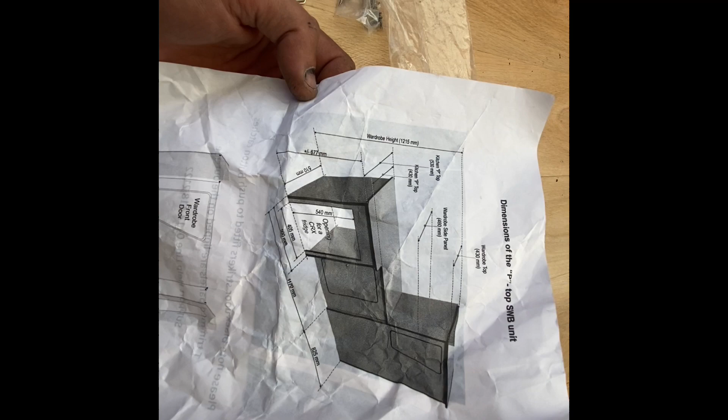That's the instructions we've got, so I've got an idea how it goes together. I shouldn't really need more than that.

Support helpline - support, can you send me out another bloody hinge, please?

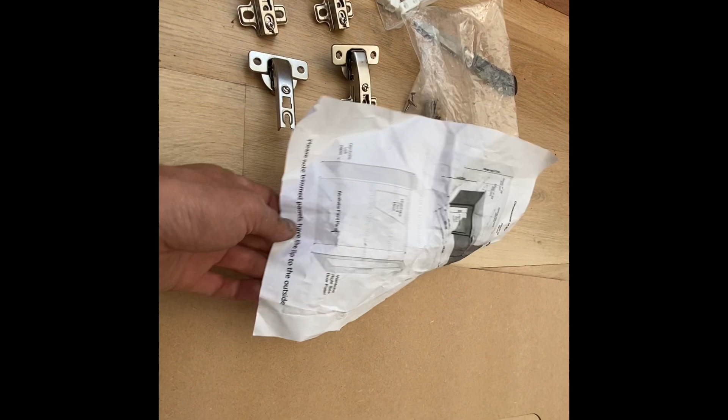And then the door - the other thing I'm going to need is the locks, and I also need the edging strip to go around there. So I'm going to take this measurement here now across there, order some locks for that, and also the trim. I need to do that first so I can get that on its way to me.

So we've got 15mm for the thickness of the door and 20mm for the diameter of the hole for the lock. I've just measured around all of the sides with the tape measure, the ones that have got that groove cut into them for the trim to go on. It's 20 meters, so I've just ordered 20 meters of trim and some push button locks that are 20mm in diameter for 15mm thick board.

I had to just make a guess which way around to have my oven and sink. So I'll have a look now at putting some of the bits together and seeing how it fits. Guesswork.

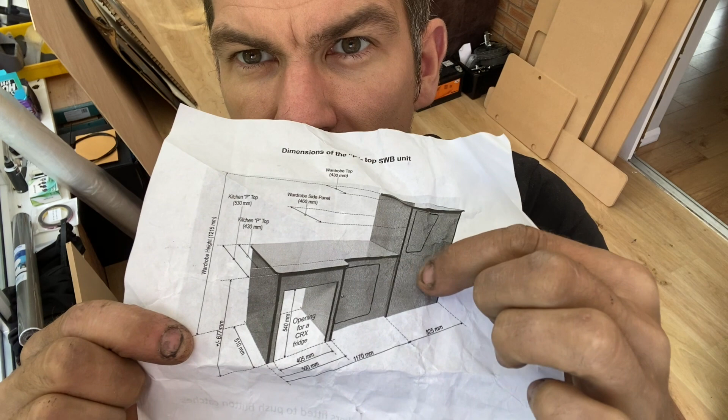So I've just realised something. It came flat packed in 2 boxes - all that stuff over there, which is for this tall wardrobe unit here, and the stuff on the other side here, which is for this unit here. Now it comes with a top, 2 fronts, a door, and 3 sides, so there is actually a side in there.

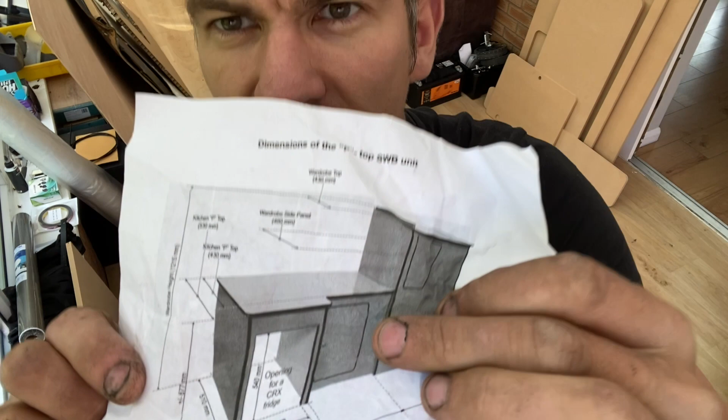And now looking at the picture, I can actually see that there's a trim going down that one, which is that tall one over there, but there isn't a trim there, which means that front section overlaps the front of that. It's good that it does that, because I was looking at lining up this panel to this edge, and I realized that the trim piece that goes around the edge of the wood overlaps the sides, and if that went flush to that, it wouldn't be able to fit on.

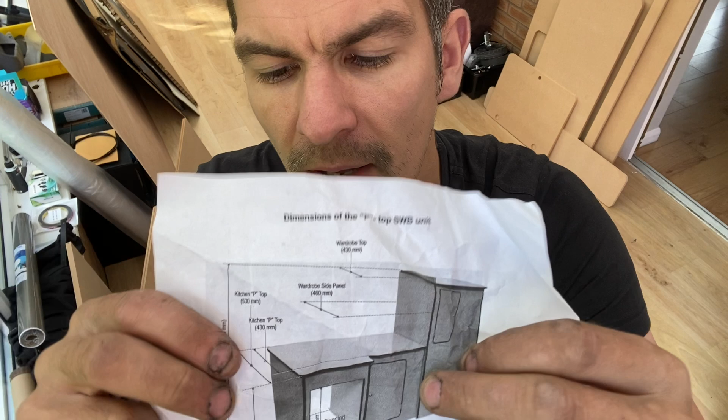So what I'm going to do is start at that end instead, work my way this way, and I reckon I'm going to end up with a 15mm overlap, where the top overlaps that, compared to where I had it laid out before. Let's crack on.

So my board is 15mm, so I've got about 12mm from the tip of my drill bit to the start of my tape, so that when I'm doing a hole, I don't punch all the way through the wood. I've also got a pencil line mark on there, so for my first hole I go up to my tape, and for my second hole, since I'm drilling through one of these blocks, I go up to my pencil line so that I get the same depth.